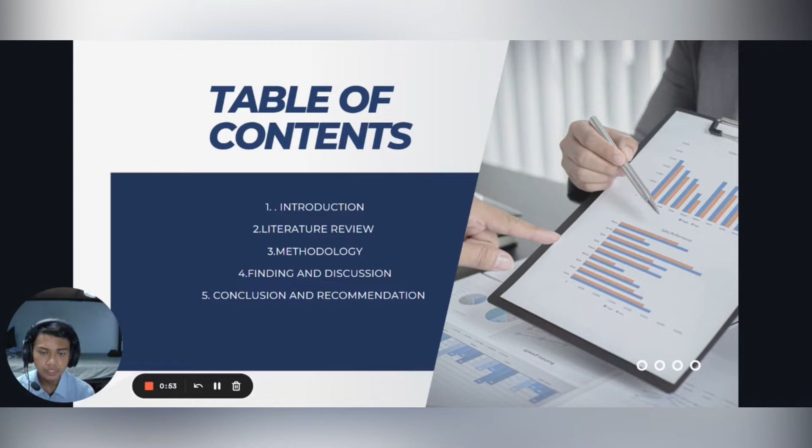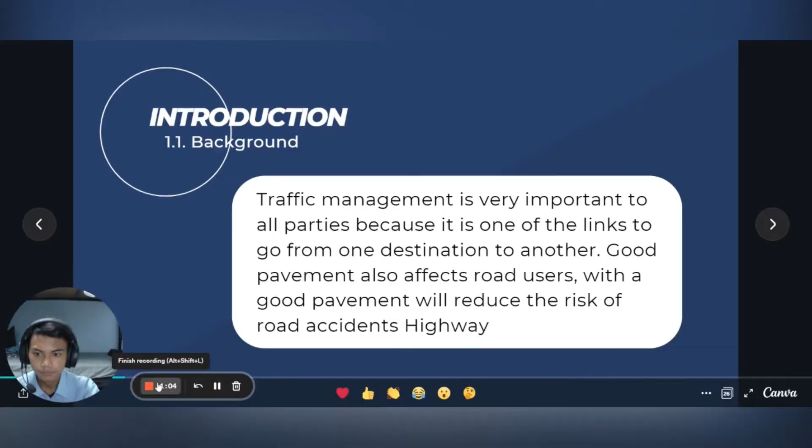For our introduction, under 1.1 background, traffic management is very important to all parties because it is one of the links from one destination to another. With good pavement, we will reduce the risk of road accidents on the highway.

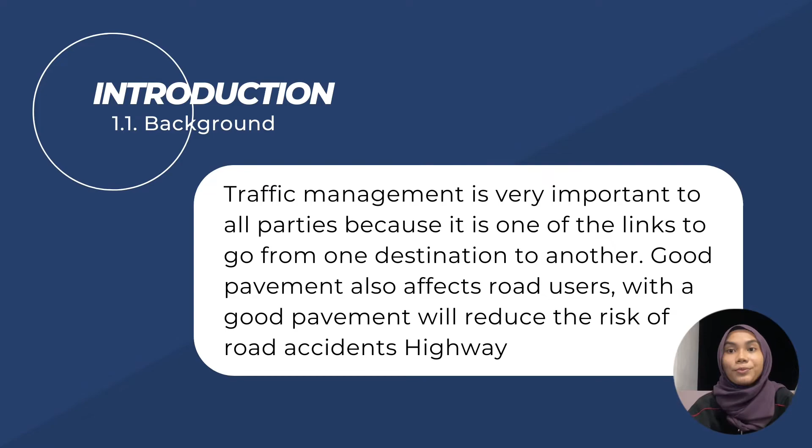Now we move on to 1.2, our problem statement: improving road safety is a global issue that must be addressed immediately. In Malaysia, there were 281,527 road accidents reported in the first half of this year, up 2.5% from 274,556 in the same period last year. Wow, that's a lot.

Individuals are injured or killed because of road incidents. Families and communities are affected. It puts a strain on the healthcare system as well as causing loss of productivity and financial loss. Eventually, this has social and economic ramifications, with adults accounting for more than half of all traffic fatalities.

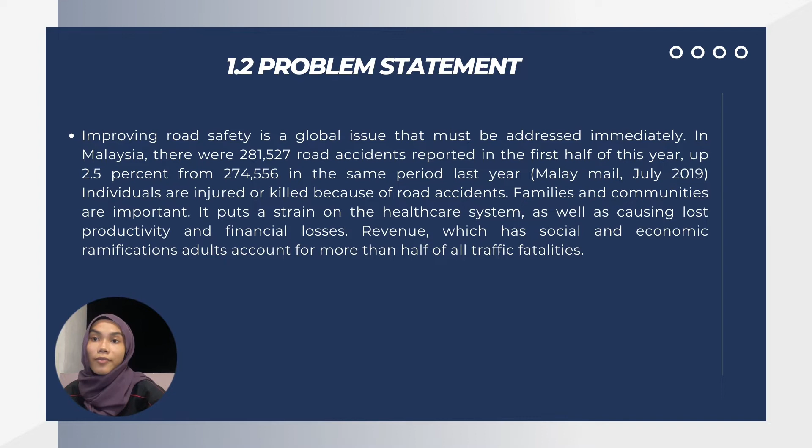Now we move on to 1.3. Next, we recommend applying road maintenance techniques for the road sections. We also recommend appropriate traffic management techniques when maintenance work is carried out on the road sections. That's all for me.

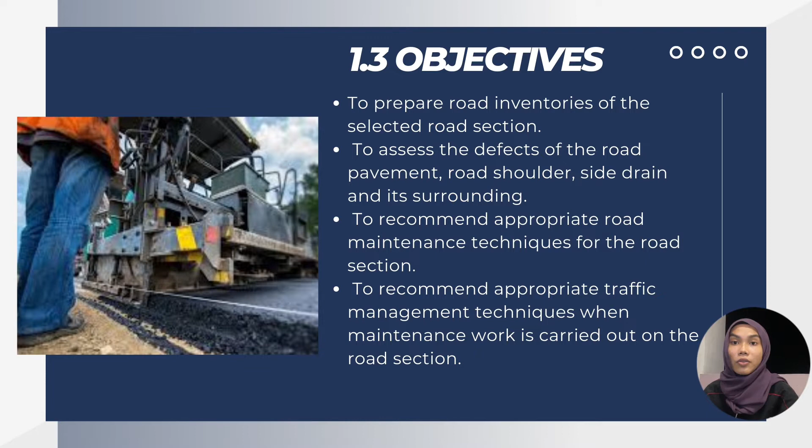Road maintenance is essential in order to preserve the road in its originally constructed condition, protect adjacent resources and user safety, and provide efficient, convenient travel along the route. Unfortunately, maintenance is often neglected or improperly performed, resulting in rapid deterioration of the road and eventual failure from both climatic and vehicle use impact. It follows that it is impossible to build and use a road that requires no maintenance.

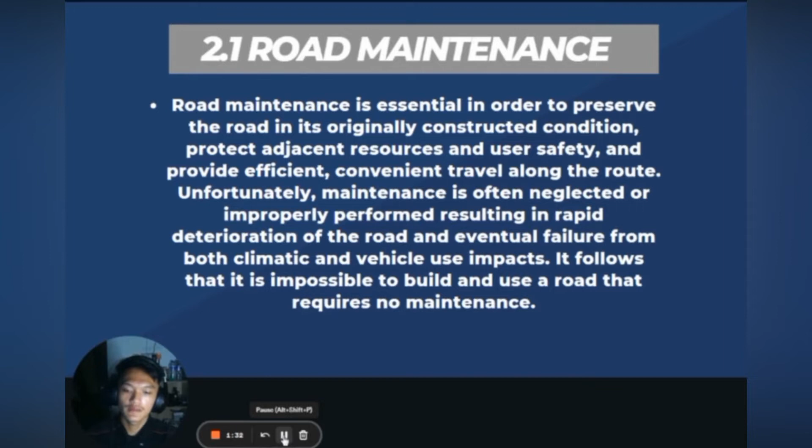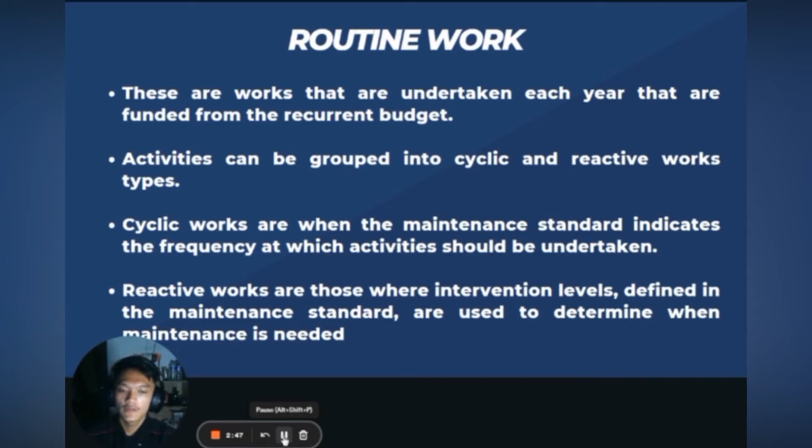Let's go to routine work. These are works undertaken each year that are funded from the recurrent budget. Activities can be grouped into cyclic and reactive work types. Cyclic work is when the maintenance standard indicates the frequency at which an activity should be undertaken. Reactive work is where intervention levels defined in the maintenance standard are used to determine when maintenance is needed.

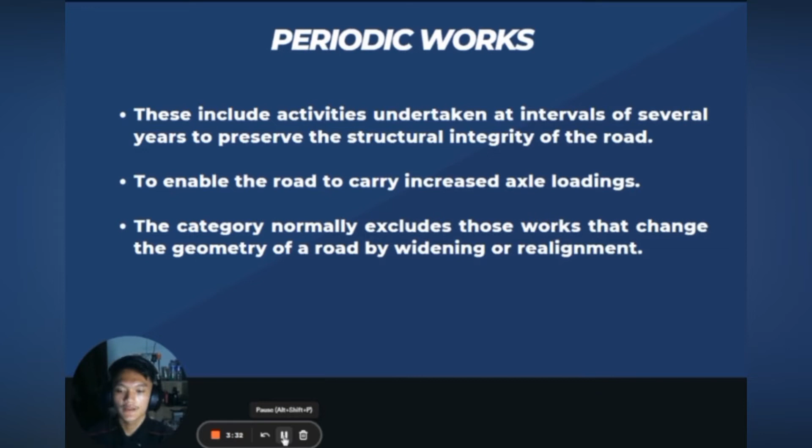Next is periodic work. These include activities undertaken at intervals of several years to preserve the structural integrity of the road and enable the road to carry increased loading. This category normally excludes work that changes the geometry of a road by widening or realignment.

The next one is special or emergency work. These are activities whose need cannot be estimated with any certainty in advance. The activities include emergency work to repair landslides and washouts that result in the road being cut off or made impassable. Contingency allowance is normally included within the recurrent budget to fund this work, although separate special contingency funds may also be provided.

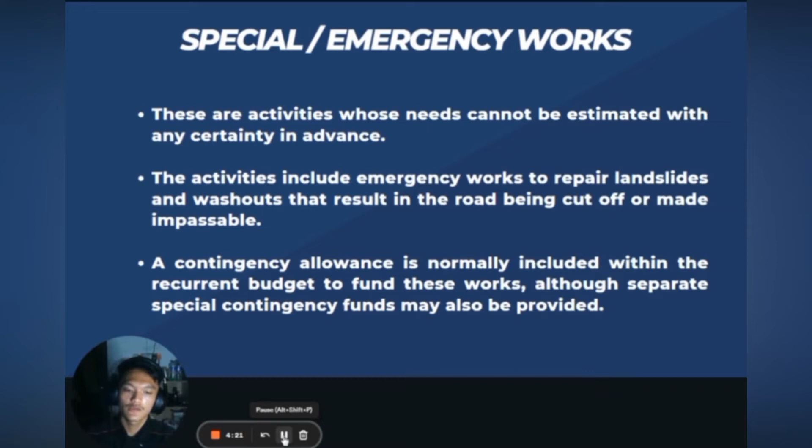So the next slide is road maintenance technique. We have 6 techniques. The first one is asphalt overlay, which restores the road to a smooth condition.

The second one is patching. Patching is the process of filling potholes or excavated areas in the asphalt pavement.

The third one is reshaping. This is necessary when a road surface is too damaged to be made smooth.

The next one is slab replacement. This refers to replacing a section of paved road.

The next one is smoothing. This is when you lightly rework the gravel of a road without digging too far into the subbase.

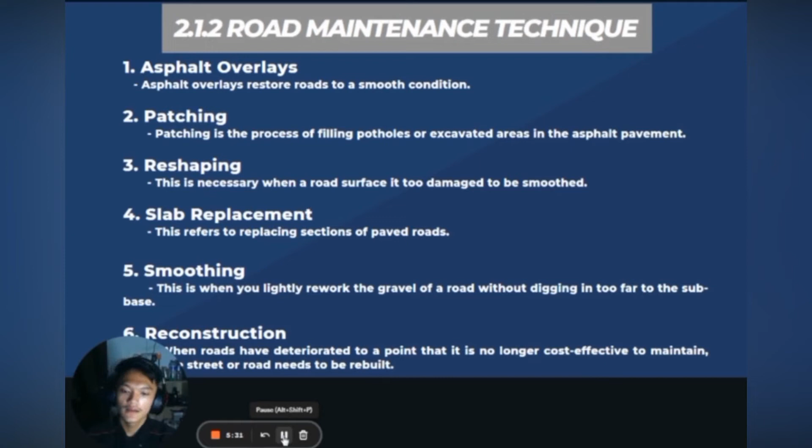And the last one is reconstruction. When roads have deteriorated to a point that it is no longer cost effective to maintain, the street or road needs to be rebuilt.

The next slide is traffic management technique during road maintenance. This has 3 techniques: the first is management of payment for traffic facilities, the second is management of information to road users, and the last is enforcement and traffic regulation management.

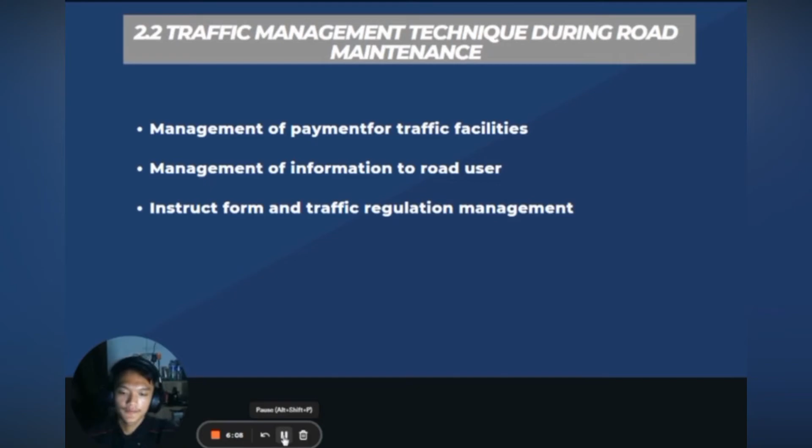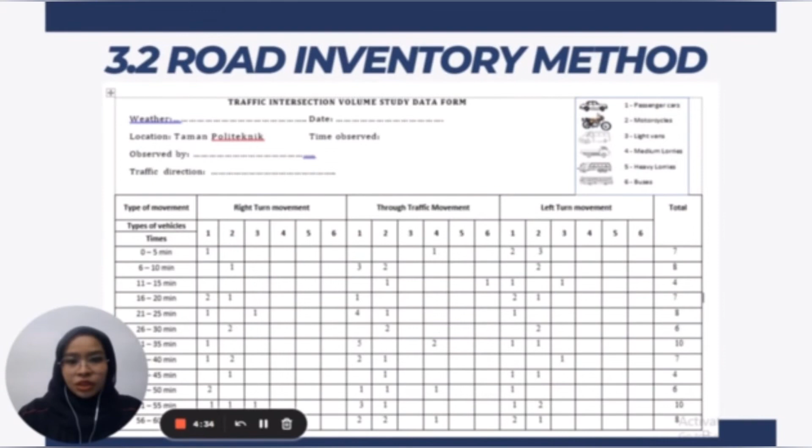For the road inventory method, our data was taken. This is our data.

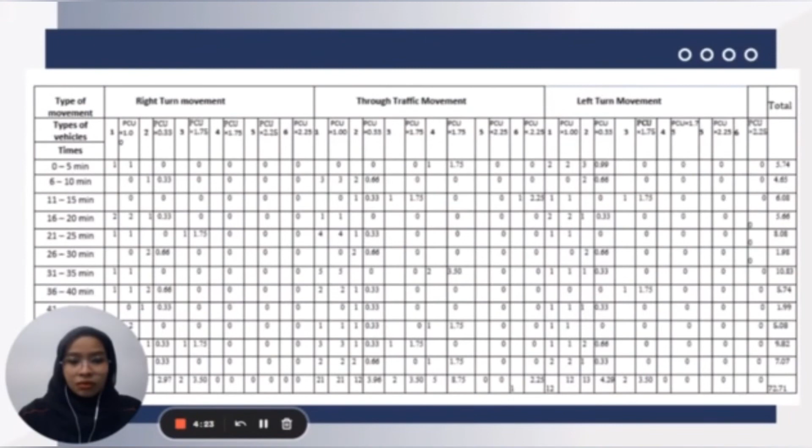Road damage inspection method: the ability of a road pavement structure to perform its function decreases as traffic loads increase, especially for overloaded large vehicles, which is one of the most critical concerns for road pavement maintenance if the situation is not handled. In Malaysia, for example, there is currently no legal restriction on which roads big vehicles can use, despite the fact that road pavement is intended to support vehicle loads based on their respective categories.

Heavy trucks are not permitted in residential zones, prompting the resident association to erect unlawful barriers at the entrance and departure points of the residential estate's access road.

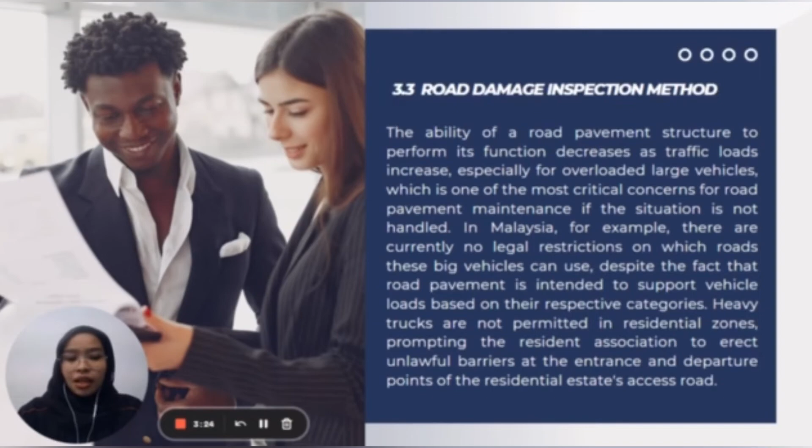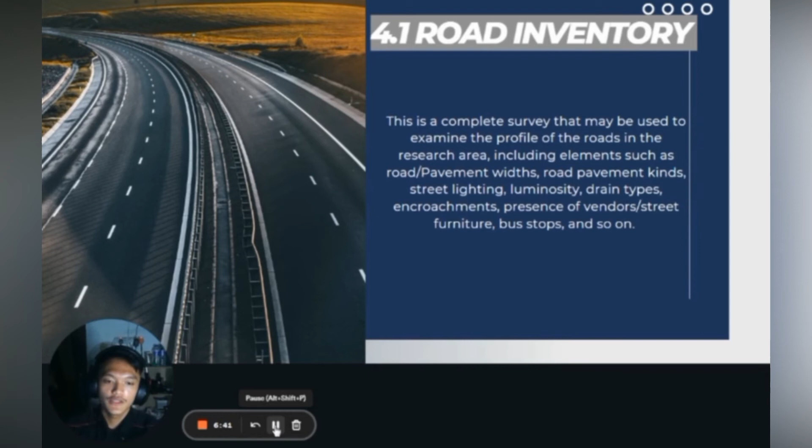Including elements such as road or pavement width, road pavement kinds, street lighting, luminosity, drain type, encroachment, presence of vendors or street furniture, bus stops, and so on.

So the next slide is road damage. The main reason a road may become surface damaged is heavy traffic. This consistent stress can cause weakness to emerge in the road surface, which as a result causes cracking.

The second one is water. Water seeps in and weakens the base course layer, causing depression if the surface cracks, which can happen over time or as a result of very strong stress on the road.

So the last one is the earth itself. The earth's tectonic plates are constantly shifting, and this, along with earthquakes or other natural events, can cause the surface beneath a road to move and settle over time.

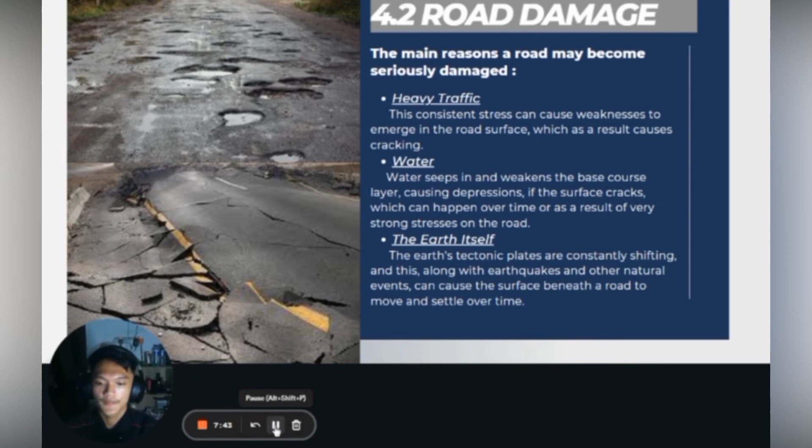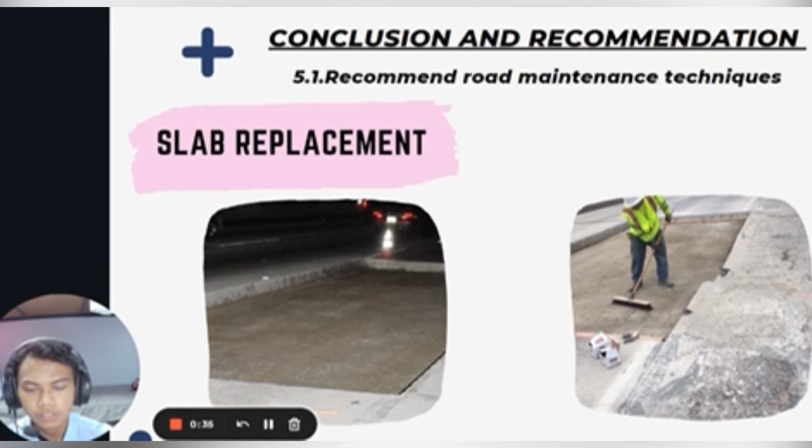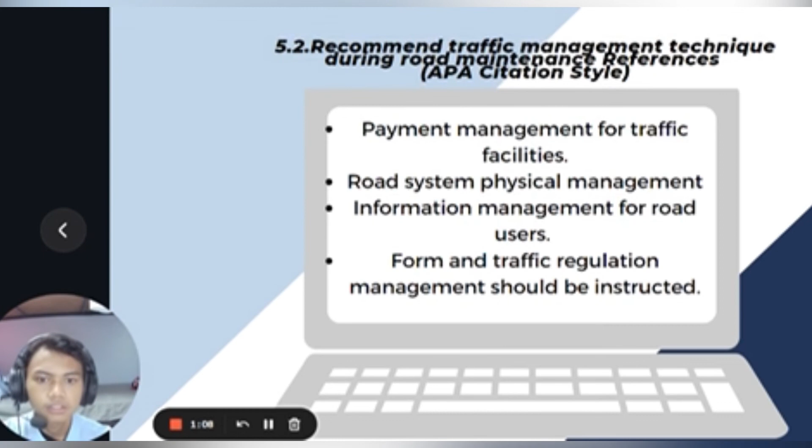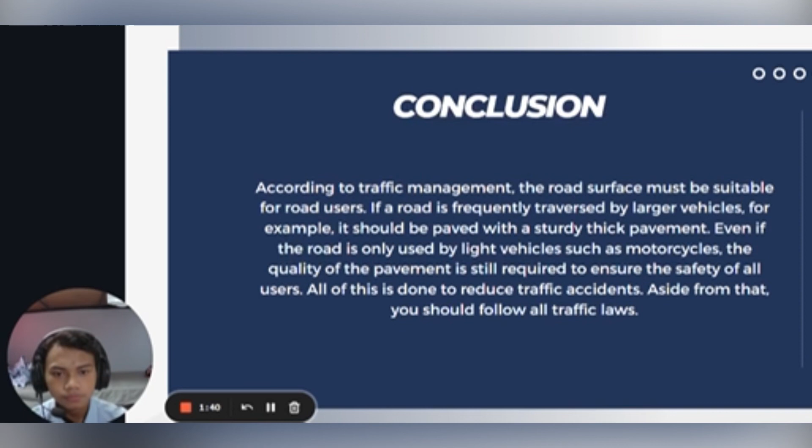Aside from that, you should follow all traffic laws. So I think that's all from me, and thank you for giving some attention.